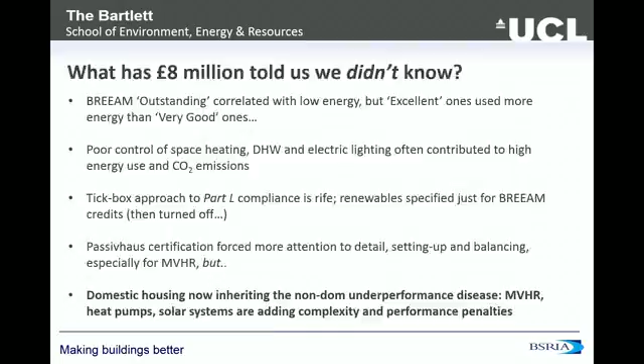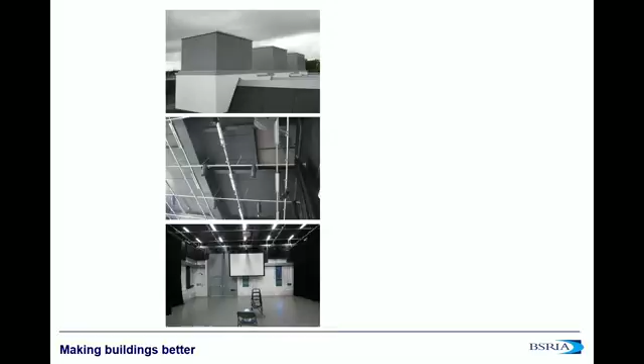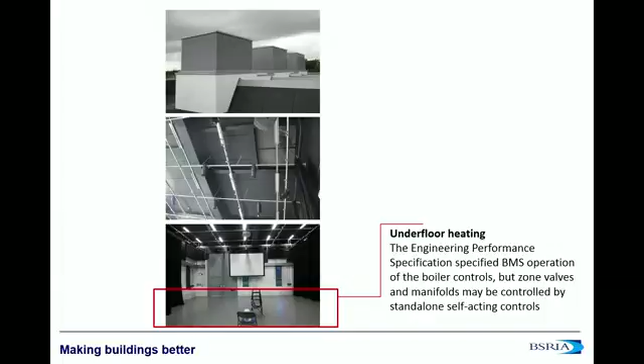I'm not going to read all this out, but essentially the specification had specified BEMS operation of the boilers, but the standalone controls, the underfloor heating, were doing their own thing. Not so much of a problem, if only for the fact that it's supposed to integrate with the wind-assisted ventilation, which the BMS couldn't control, it could only oversee. Despite the fact they put in a new controller, they're still not utterly convinced the BMS is actually controlling everything.

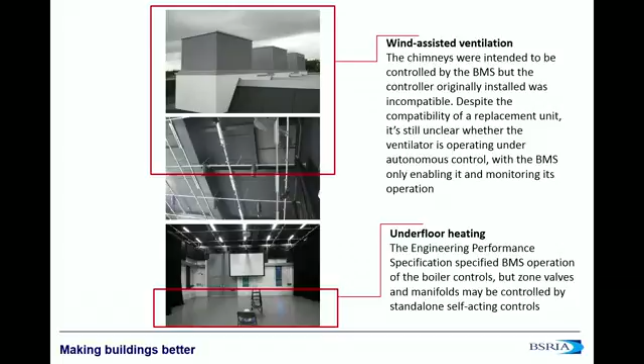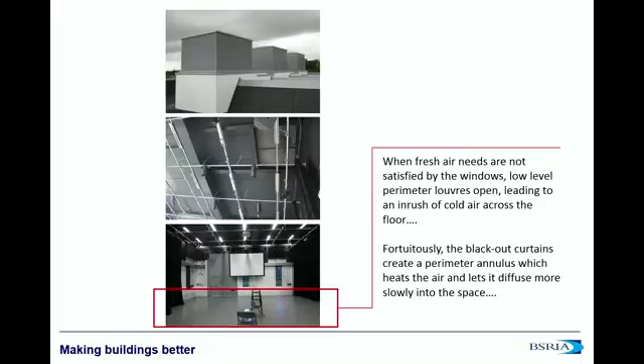The stack-assisted ventilation system seems to be a law unto its own. That wouldn't matter so much, but there are vents in this drama studio that open to ventilate it, rushing cold air across the floor, and the underfloor heating can't handle that. They've got blackout curtains, and when they're closed, the problem disappears. But it's not really an answer, is it?

Let's be honest. But when they did the testing on this space, they discovered that the uncontrolled infiltration through the passive stack louvers amounted to about 1.5 air changes. So, what could possibly go wrong? Well, quite a lot, just on that one.

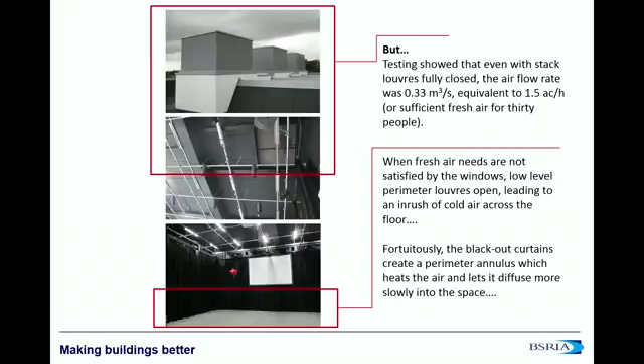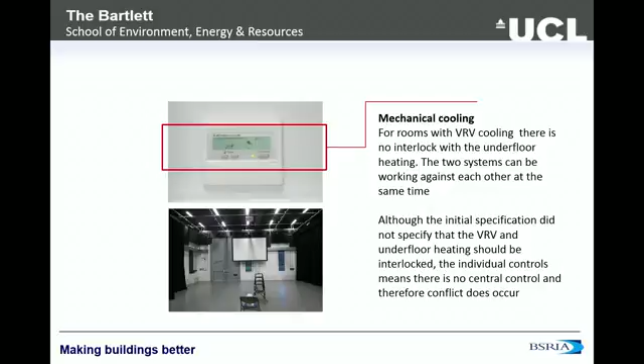Now, elsewhere in the building, they had other problems, the systems fighting each other. This isn't quite the right space, but I didn't have a photograph of the actual space. Essentially, because they didn't specify in the specification that the VRV, variable refrigerant volume air conditioning, and the underfloor heating should be interlocked, the fact that they're all individual controls means these things run riot, and of course they conflict with each other. There's nothing they can do about it, because it's job done.

So there we go, but not to worry. It won an award. That's all that matters.

I think we need to get out of this as well. I think each of you needs to go back to your organizations and actually ask your own questions. Do you celebrate your buildings on your websites when they've won an award and then not do the BPE and actually come clean about the energy consumption? I'll leave that one with you.

And so this is good news. These are good buildings. The problem here isn't the buildings themselves, around 800 square meters. The problem is it doesn't scale awfully well.

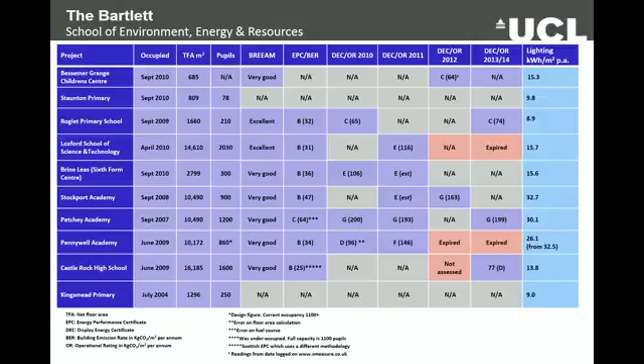BUS surveys that others have mentioned - a couple of things I'd just add to the debate. Here we had an extension to Bessemer Grange Primary School, and when they did the occupant survey, again, as Kevin experienced on one of his buildings, a row of greens. That's fantastic. But it comes back, I think, to a question of the audience in the last session.

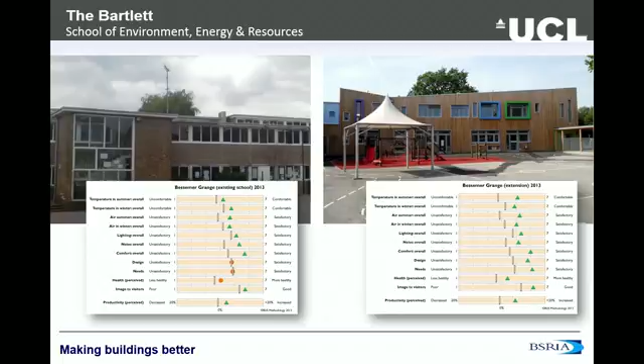When we did the survey on the existing 1950s school next door, guess what - this is interesting, because basically what it's saying is that although a building is typical in terms of its needs and design, and not necessarily regarded as a particularly healthy place, although it's pretty neutral, the school is performing pretty much as well as the new one. Now, the point to take away here is that old buildings have virtues that we ignore at our peril, and we need to understand what those virtues are when we're designing new.

So this is a really interesting finding. We think we're solving performance problems with new buildings, but actually old ones can do just as well. Now, there's a whole presentation in those 2 slides, so I'll say no more.

So when we talk about building performance evaluation, I think it begs a question. As technologists and engineers and architects, we're actually much more interested in the technical criteria. But once the building is handed over, it's the contextual stuff that matters most to the building owners, and it's stuff that we actually have grave difficulty in getting a handle on. This stuff, because it's so important, arguably more important than the technical criteria that we all understand, we need to find ways of assessing it, and we need to find ways of assessing it reliably, which is why I'm at UCL.

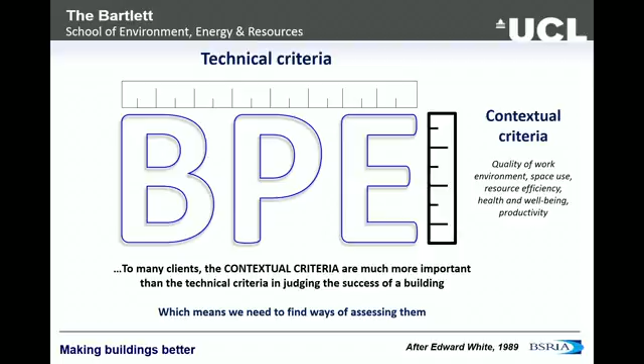Now, if you want - I'm not going to steal Matt's presentation - but you can go to the Building Data Exchange website and download all sorts of stuff, all the reports on the projects. If you scroll down, you'll come across a report on the domestic buildings, and you might start with reading the findings from the non-domestic projects. So that's a good place to go.

Well, what do I think, having been involved in the £8 million BPE program, what do I think the legacy is of all of this? Well, I'm going to be a little bit controversial here, and hopefully we can fuel some debate afterwards.

The first bullet point, I think, is pretty obvious. Despite money piled in by the Carbon Trust and Probe in the 1990s and now this £8 million BPE program, we're just not getting better buildings. If anything, they're going backwards. We're getting excessive energy consumption and, by consequence, carbon dioxide emissions, and often the renewables are masking fundamental underperformance in the building.

EPCs - they're not only not worth the paper they're written on, they're not worth the ink they're written with. And I think we've got to call time on this because it's misleading us. I also think there's so much Part L model fudging going on that also has to be brought into question. And of course, the policing of display energy certificates is hopeless.

Good news is that BREEAM Outstanding and Passivhaus seem to be showing the way to go. When you raise the bar and you put the certification in place and put the policing in place, you're more likely to get a better result. You know, discuss.

One of the biggest issues I have is that, and it's partly a consequence of design and build, but not wholly associated with design and build - we don't have enough understanding amongst the project partners throughout the project, as the project progresses, to actually understand the component parts of performance and keep them live and keep on top of them.

I think there's a lack of skills and tools to visualize and track performance as it emerges. It cannot be a shock after handover. We've got to see things coming much better. We have to be able to model it or present it in a simple and robust way, particularly as it emerges, not after the event.

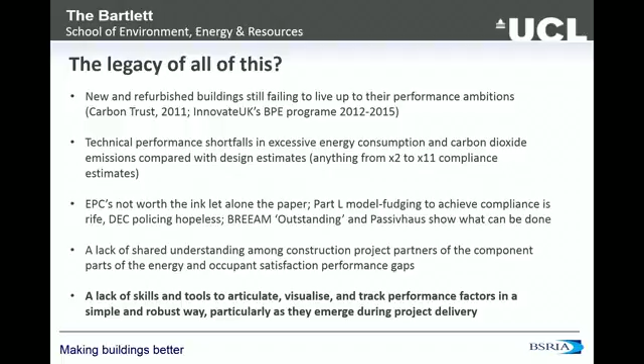So, where do I think, as an engineering doctorate student at UCL - I thought, well, okay, what's my perspective on this? I was a UCL doctorate student before this presentation. We'll see what happens afterwards.

I can say quite happily that I believe the UCL students with whom I work, going through various MSc modules, are being very well versed in the performance gap and the need to close it. No problem there. I think that's great, and the modules I know and love are actually focusing on both the quantitative and the qualitative tools.

That's great. But, and it's not a big but, it's a little but, these things can't be taught in isolation. There needs to be an overarching framework. Managing the soft landings initiative out of BSRIA, I would say that needs to be the overarching framework. If not soft landings, then something like it. It has to be integrated, not a bolt-on.

As others have said, we desperately need the culture of feedback and aftercare to make BPE routine. The other thing I think educational establishments up and down the country would take note of is the realities of construction that practitioners amongst us live and breathe day to day - time and cost pressures, the forms of contract, project team relationships, miracles of economy otherwise known as value engineering. These things need to be tackled head on.

It's too important to let students go out into the outside world and discover it for themselves after the event. We need to be tackling this straight on, which leads me to one of my bottom lines - that postgraduate support in this is vital for follow-through. You know, graduation is the end of the beginning.

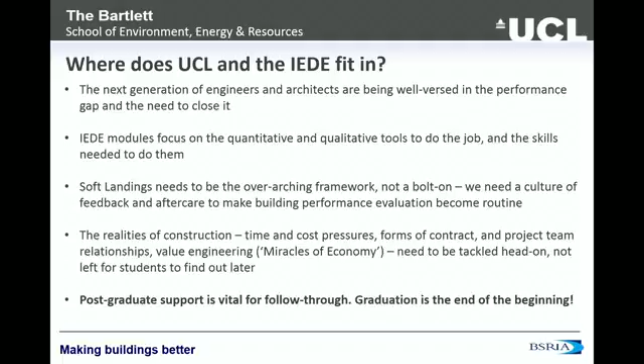Good news, another piece of good news is that the evaluators on the program have decided to stay together as a group. One of the things I hope we will do is offer our advice and support to those students that need it, now the building performance database is available to them for their MScs and PhDs. I think that would be a really good thing for us to do, and I'm looking forward to working with students on that.

So we clearly have the wit to deal with building underperformance, but do we truly have the will, and what are we going to do as a consequence of today? That's me done, under time as well. Thank you very much.

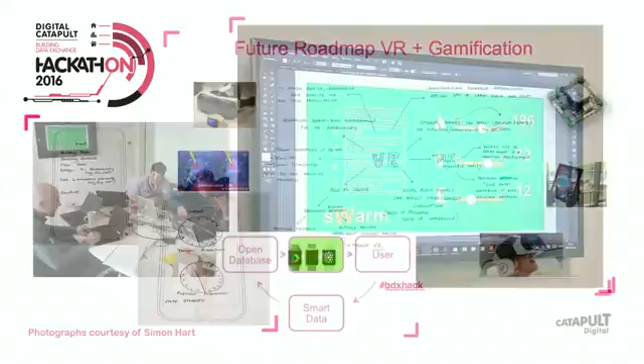Team Swarm came up with a working prototype and actually didn't use building performance evaluation data at all, which is slightly frustrating, but that's okay. They were using information from the Retrofit for the Future program and tapped into the NEED database, the National Energy Efficiency Data-Framework - pushing out the boundaries of the information they had to hand.

This was looking at how you increase the quality of information feeding - not necessarily EPCs, because we didn't like EPCs, but the kind of information people would look at when making a purchase decision or a retrofit decision. This used their Swarm platform, taking information from various databases, running it through their engine, giving it to the user, and allowing the user to add to that information to feed back into the open database. This database, via APIs in different circumstances and scenarios, is able to constantly update and grow as a platform to inform the building user.

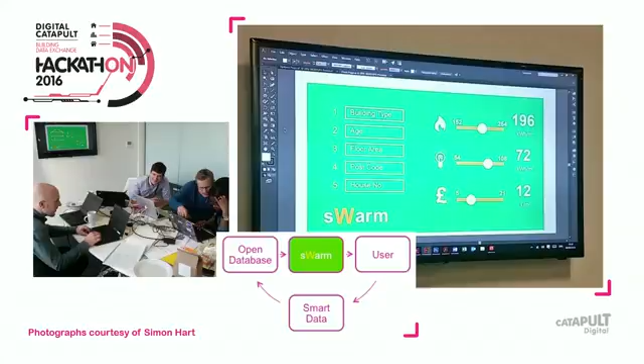Now the winners were Team Active, and they came up with the Active platform, a software as a service application, which basically means they will sell you a piece of kit, and then work with you using that kit over a period of time to increase the skills or ability of the facilities management to make the workplace a happier place for employees. The team's theory was that a happy workplace is a productive workplace.

You say, okay, that is absolutely fine, but the key thing here is that BMS systems are fairly impenetrable, and they work with a closed team of facilities management. The operation of a building is fairly disconnected from those people who use it.

And so it puts the power of feedback into the hands of the people who use the building through the Active app. They had a real-time app on a smartphone which was taking in light levels and noise levels. You had the ability to feed back saying it's too noisy, too hot, too cold, and really enable the teams to feed back to the facilities manager to optimize their building for the building users.